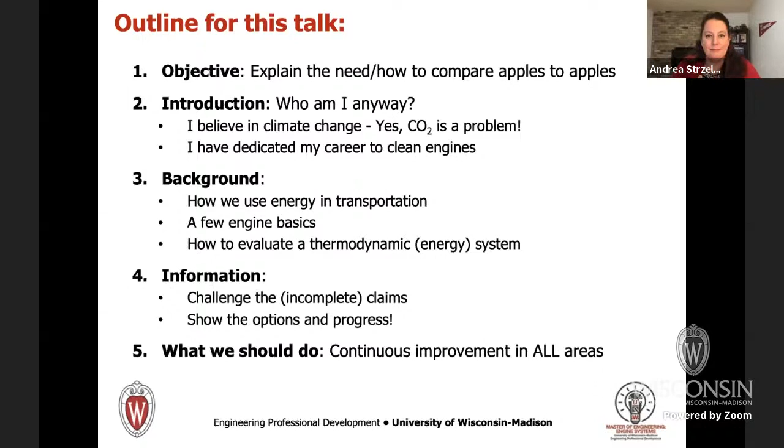Okay, so I have to start with a few acknowledgements. I used material from several people and I want to be very upfront about that. Dr. Kelly Senecal from Convergent Science here in Madison, who is really my inspiration for getting the word out and having the chance to have these opportunities to speak on this.

He is a Badger, and he gave a TEDx talk in Madison, which kind of inspired me to passionately promote this idea. He also started the Hug Your Engine hashtag. So lots of good stuff there.

Professor David Foster from the UW-ERC, my PhD advisor and a Badger. Professor Dennis Assanis from the University of Michigan Auto Lab and now president of the University of Delaware. Dr. Graham Conway from Southwest Research, and Dr. Todd Fansler, who worked at GM but now in his retirement years likes to do some research with us here at UW. So I thank them all for donating material.

I'm really honored to have this opportunity to add my voice to theirs and give my version of the explanation. So thank you, Tom, and Wednesday Night at the Lab for this opportunity.

So what is my objective in being here to talk to you tonight? Well, in this talk, I want to trash some false ideas. I want to tell you that electric vehicles are not zero emission vehicles, and I want to convince you that in fact there is absolutely no such thing.

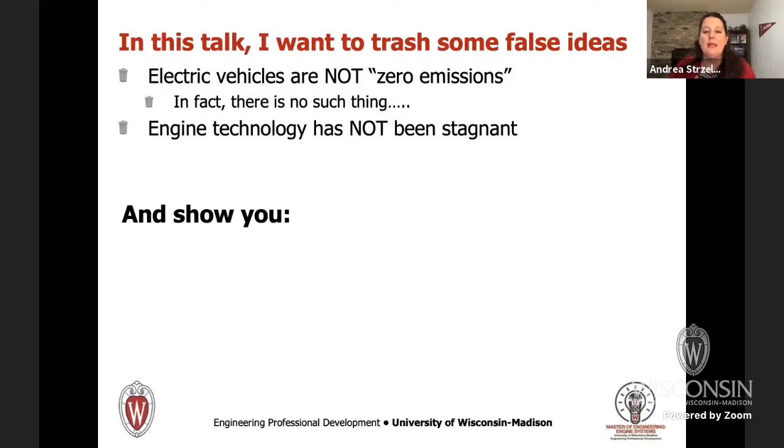There are things on our side of the table too that give you pathways to clean, green solutions. So what I'm hoping to really trash is the idea of a silver bullet, or the idea that a green future relies only on a single technology. It doesn't. My friend Kelly coined the phrase, the future is eclectic, and I think that needs to be true.

I think we need to not choose things a priori. We need to let the science and engineering dictate what's the cleanest, most efficient future. And the only way we're going to do that is if we continuously develop in all areas and let the winner emerge rather than choosing it in advance.

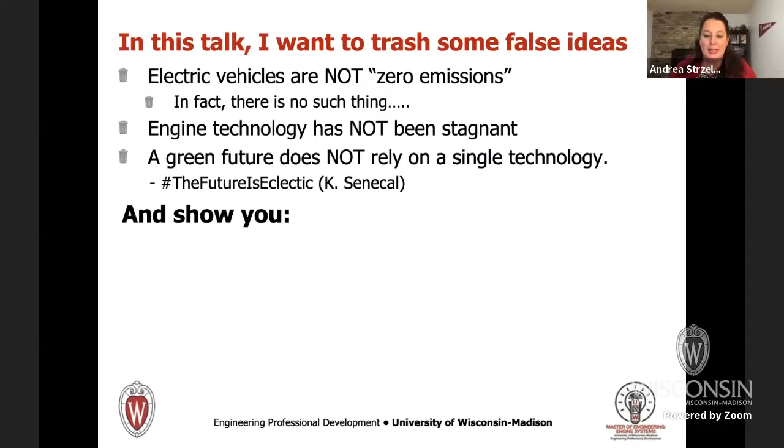I also want to show you what I like to say: dirty is in the details. In order to really evaluate things, you have to draw proper boundaries. An example of that is this lovely cartoon here, which shows two vehicles.

The top one is a diesel, and the guy inside who has tailpipe emissions feels really dirty because he has visible tailpipe emissions. The guy in the electric vehicle on the bottom has no tailpipe emissions. In fact, most electric vehicles don't even have a tailpipe, so he's feeling really clean. But the reality is he's using electricity from the power plant there, so he has distributed emissions, just not at the tailpipe.

I also want to show you how engines are continuously getting cleaner, including some of the work done right here at UW-Madison in novel combustion strategies and in catalysts. By the way, this is not only true of electric vehicles, but this cartoon has a version of fuel cells too.

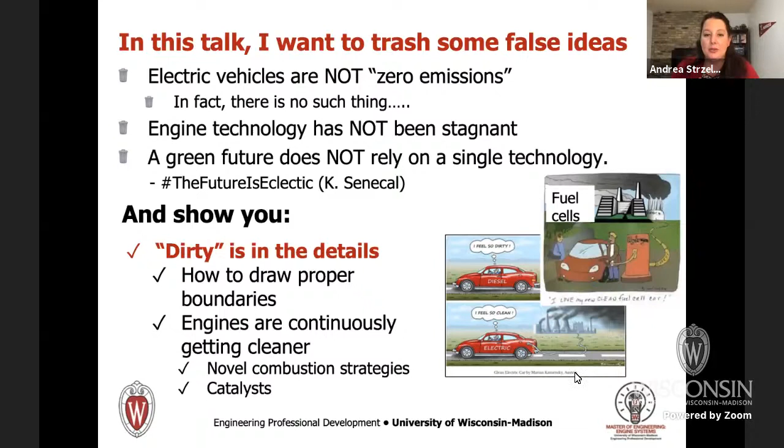Hydrogen does absolutely burn without generating any CO2. When hydrogen burns, you only have water as a product of combustion. However, hydrogen is not naturally occurring as a fuel, and it takes a lot of electricity to produce it. Therefore, fuel cell vehicles, while they don't have any CO2 at the tailpipe, do in fact have CO2 emissions associated with the formation of that hydrogen.

So why am I talking about this in particular? Well, I am a literal engine hugger, and I am the program director of the Master of Engineering in Engine Systems program here at Wisconsin. As Tom mentioned, I am a triple threat badger, studying right here at UW and in the Engine Research Center. I did my PhD work in collaboration with Oak Ridge National Laboratory, sponsored by USDOE, so I like to thank them for that PhD.

My work experience after I left Madison, I worked at two USDOE labs. There are 17 DOE labs, I've only collected two. Then I was a professor of mechanical engineering, first at Texas A&M and then at Mississippi State. So I want to say hi to Troy Huron, who I saw join — he was a former student. Then in 2019, I had the opportunity of a lifetime for any Badger: to come back here to Madison and work at my beloved University of Wisconsin. And so I've been back.

One thing my students can tell you about me is I am absolutely passionate about thermodynamics. Thermodynamics, as I mentioned before, is the study of energy, its transfers, and its transformations. But in order to do a proper thermodynamic analysis, you really need to set the boundary for that analysis, and I'm going to show you what that means.

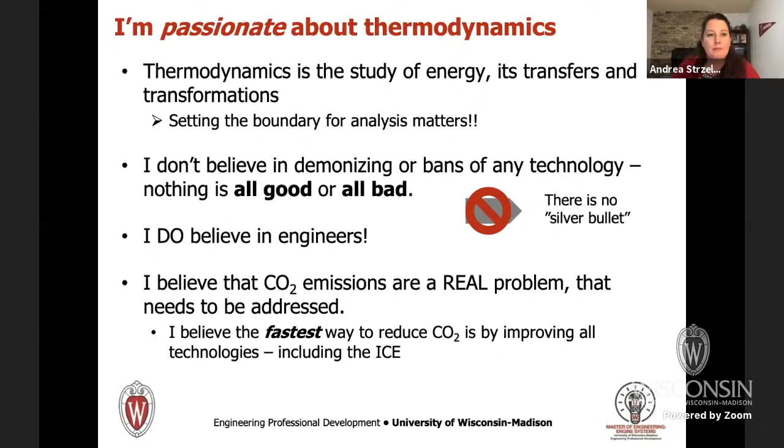So let's talk about some background. Here's energy use in the United States. What you see is that transportation accounts for 34% of all energy used in the United States. One thing I want to talk about is fuel economy — it's not only good for your wallet in that green way, it's also green in terms of emissions.

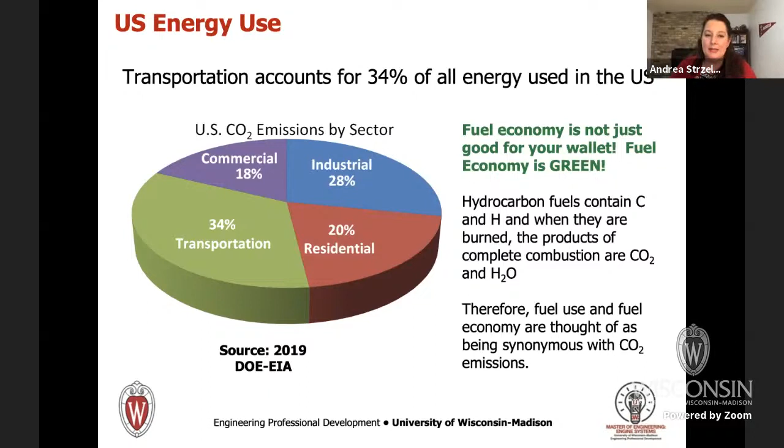Hydrocarbon fuels contain carbon and hydrogen, that's where the name comes from, and when they're burned, the products of combustion are CO2 and water. Therefore, anytime you're able to get more mileage out of a gallon, it means you're also getting more mileage for the same CO2. So we tend to think of fuel economy and CO2 emissions as kind of being synonymous because they are very much related.

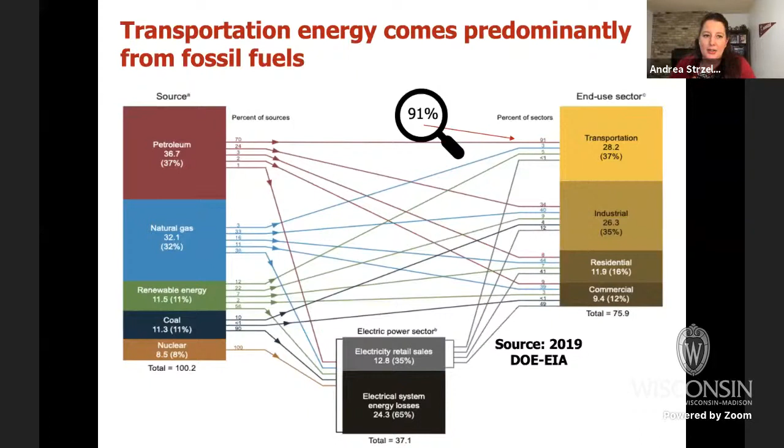Now, in the United States, transportation energy predominantly comes from fossil fuels. You can see my magnifying glass there shows that 91% of the energy in the transportation sector comes from petroleum. So that's why it's related to fuel economy, hydrocarbons, that whole nine yards.

If we take a minute to look at the history of engines, the first thing I want to point out is that the very first on-vehicle engine was actually a steam engine, not an internal combustion engine at all. Engine development has come quite a long way since the 1760s when we had steam engines on vehicles. The first internal combustion engine wasn't invented until 1807, and the first diesel engine, Rudolf Diesel's engine, in 1892, ran on coal dust.

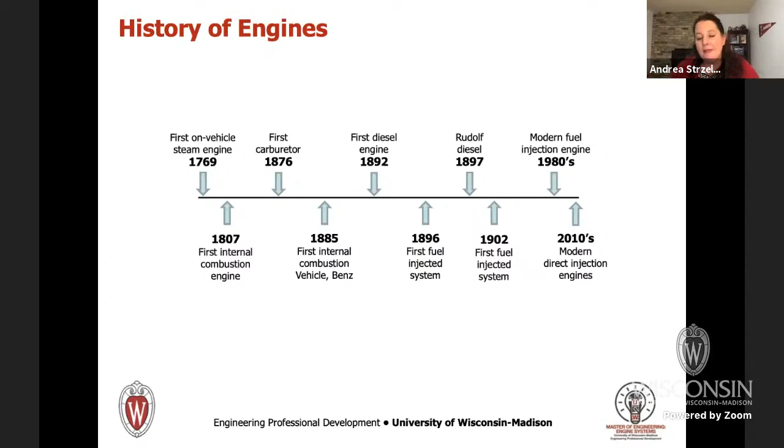The thing that's really important to notice here is, although I don't have a ton of arrows on that timeline, there has been continuous improvement in engines ever since they first appeared.

So what is the purpose of an internal combustion engine anyway? The purpose is to produce useful work, and the useful work we're talking about in this case is rotating shaft power. They do it by using readily available, stable combustible fuels, like liquid fuels such as gasoline or diesel, or gases like natural gas or propane. These fuels have a high power density, which is really important for both functionality and speed of the engine. Engines do this efficiently and at low cost, and in some cases the efficiency is greater than 50%.

For those of you that think, well, 50% isn't that great - actually, it really is. There are a lot of factors that come into play, and we're going to talk about how every time you transfer or translate energy, there's potential for losses through things like friction or electrical resistance. So 50% is actually pretty good, and it's certainly much higher than what we were seeing back in the early days of engines.

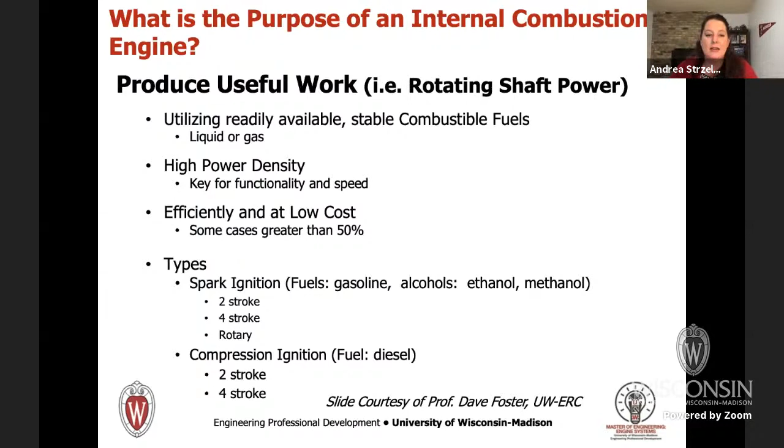There are two types of engines that are most common that we'll talk about: spark ignition engines, which are your gasoline engines, using fuels like gasoline and alcohol - this is why you see some ethanol in gasoline - and they come in 2-stroke, 4-stroke, and rotary varieties. Then there are compression ignition engines, which are your diesel engines, that also come in 2-stroke and 4-stroke varieties.

So how does a reciprocating engine produce power? The combustion of fuel releases heat in a closed volume. If you remember the ideal gas law from chemistry, that heat released into the volume increases the temperature and pressure. That increased pressure then pushes on the movable piston, which is connected via the connecting rod - you've got to love the engineering nomenclature - to the crankshaft, and it turns and rotates that shaft.

So the source energy is the fuel - it's actually the chemical bonds in the fuel. Oxygen from the air provides the oxidizer, and that combustion reaction releases heat. That gas pressure - pressure is a force exhibited over an area - the area is the top of the piston, so it forces it down. In order for this to happen smoothly, you need to coordinate combustion with the piston motion, and we do that by controlling the ignition of the fuel.

Now, we can't exceed the physical limits of the engine, so we have boundaries we need to work within for material reasons - the stress, the temperature, the pressure have to stay within a particular realm. This thermodynamic process - combustion is a thermodynamic process - is repeated very quickly over and over on a mechanical cycle.

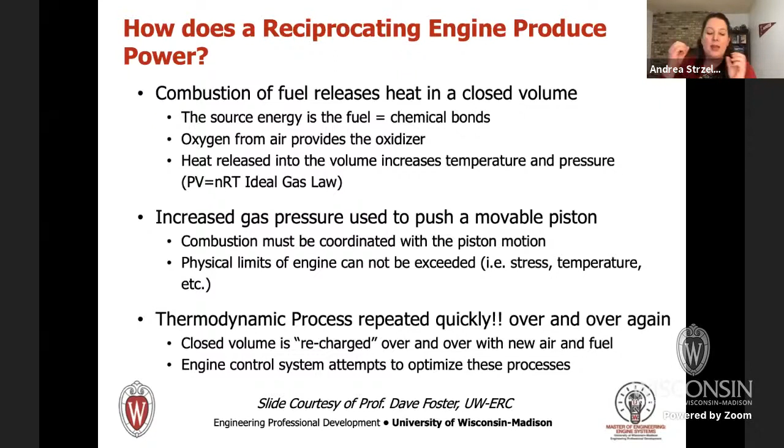That's why your spark timing is so important, so that it lights off the charge at the right time to create that power. So the 4 strokes of an internal combustion engine, if I give you their quick and dirty nomenclature of suck, squish, bang, blow, it'll probably help you remember it better than intake, compression, power, and exhaust. So I always like to say that.

What happens is the process starts with the intake valve opening. The intake charge comes into the cylinder as the piston is drawn down from top dead center to bottom dead center. As that piston pulls down that volume, it helps suck that intake charge in. And the intake charge is different if we're having a gasoline or a diesel engine, so I'll talk about that in a minute.

Then when the piston gets to bottom dead center and all that volume is filled with the intake charge, the intake valve closes, and the piston begins its movement up, compressing the gas. So you have both valves closed, so you have a closed volume, and the piston moves up and it squishes and compresses that gas. Then we have the power stroke.

The combustion event happens, and that heat release creates that force that acts on the piston and pushes it down, generating the power. And again, how that power stroke is initiated depends on the kind of engine, so we'll talk about that in a minute.

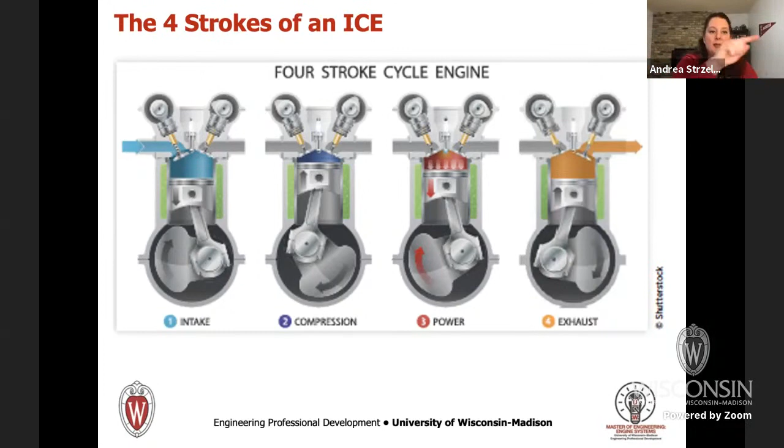Finally, when the piston is all the way down at bottom dead center after the power stroke, the exhaust valve will open and the piston will head up, pushing the spent gases out of the cylinder. Then the exhaust valve closes and we cycle back to the intake. So cycle, rinse, repeat.

For gasoline engines, which are spark ignited combustion, we have a homogeneous mixture, hopefully, that we are using as our intake charge. What we do is we pre-mix the fuel in the air before it goes into the cylinder, so that you have a nice, very well mixed air fuel mixture that's drawn in and compressed. We control the load on the engine by throttling that intake, by how much we are allowing to go in. The combustion event is initiated by a high energy electrical discharge across the spark plug gap.

So that's the spark. Can you see my pointer? The spark initiates the ignition event, and then the flame front burns throughout this mixture. This golden color here is the unburned region. This little kind of sun corona is the flame front, and you have the burnt products behind it. So the flame moves through, and behind the flame are the burned products.

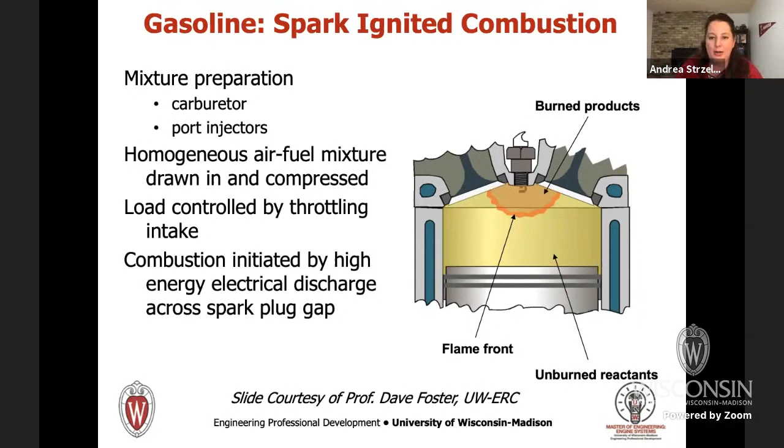In diesel, it's a different situation. Only air is drawn in as the intake charge in diesel and compressed. The load of the diesel engine is controlled by how much fuel we inject in. Now, because that fuel is injected into very high temperature, high pressure air, the fuel undergoes an auto ignition process and combusts as it is compression ignited for the combustion.

So in diesel, because you're introducing the fuel into that air mixture, you don't have that nice homogeneous mix. You actually end up with a highly heterogeneous mixture in the cylinder. There's a wide range of mixture concentrations of the fuel in the air where the chemical reactions occur. This is why emissions are a much more significant issue in diesel engines than they are in gasoline.

But you know what? That's okay, because people like me work on cleaning that up with after treatment systems. There are catalytic devices, the so-called class of catalytic converters. It's not just one device. For diesel, there are 3 catalytic converters that we use in the system, and it cleans up the exhaust, removing the carbon monoxide, the hydrocarbons, the NOx, and any of the soot. And like I said, you can clean it up with after treatment. I literally wrote the book on it, and you can see it there over my shoulder.

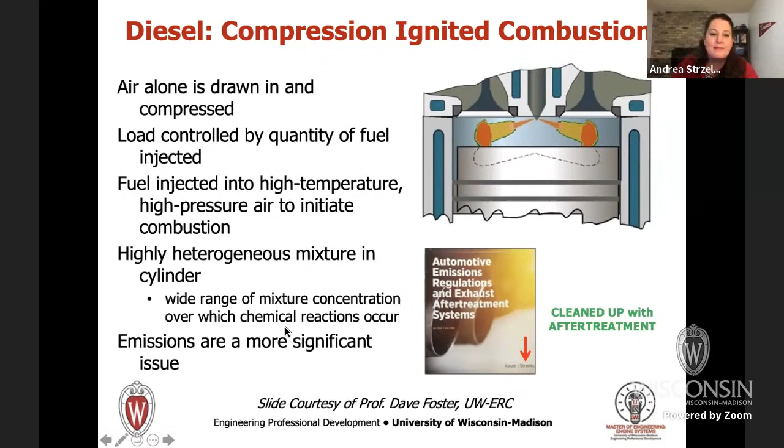There's an increase in CO2 emissions from developing nations. And on top of it, the rate of technology penetration on the vehicle fleet is not as fast as we would like. So even if you're coming out with cars every year that get better and better fuel economy and have less CO2 emissions, people aren't going out and replacing their cars every 6 months or a year. So it takes a while for the technology to penetrate into the fleet.

I also want to take a minute to talk about CAFE, the corporate average fuel economy standard. We have these CAFE standards set by class of vehicle. This is why the PT Cruiser is considered a light duty truck. If you're a manufacturer with a large range of vehicles and you want a lot of sales in your truck class, you want to enable people to buy the trucks they want to buy, so you need your average fuel economy for that class of truck to hit a target. By making the PT Cruiser fit the definition of a light duty truck, you can average in its relatively higher fuel economy compared to a quarter-ton pickup truck and meet your CAFE standard.

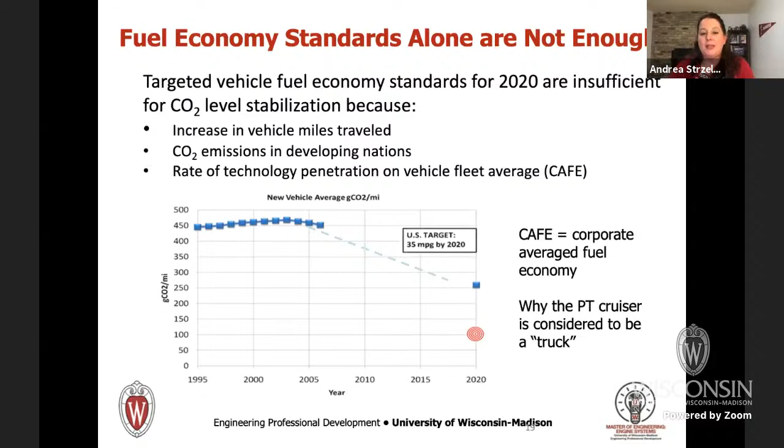We were talking before the presentation about metrics that you can game, and I think CAFE fits into that. When you look at these targets that politicians come up with, you have to be really careful how you set them, because anytime you set up a metric that can be gamed, it ends up not being a particularly valuable metric.

One thing I always like to talk about is when did engines become villains anyway? When did engines start getting all this negative press? Unfortunately, I can point to when, and that's the Dieselgate scandal. If you don't remember what that is, I'll tell you briefly. Dieselgate affected 11 million model year 2009 to 2015 Volkswagen vehicles that were intentionally programmed — please note, intentionally programmed — not to meet the emission standards. That means the vehicles absolutely could be clean; they just were intentionally programmed not to be. This scandal resulted in some really big fines and jail time for Volkswagen executives.

But the result of this was also the beginnings of the claims of the end of internal combustion engines, and what I'm going to call the beginning of the EV hype. I'm going to show you in a minute why I call it hype, because you have to look at the whole system and really make an educated determination on this.

You see here, The Economist called the engine roadkill. And what's really special about the picture on the right is that's the BMW headquarters, which was very specifically and famously designed to look like a 4-cylinder engine. They used lights to change it into looking like batteries, with the slogan 'The future is electric.' I think that's what inspired my friend Kelly to make a twist on that and say, no, the future should be eclectic. Hopefully by the end of this, you'll see why we think so.

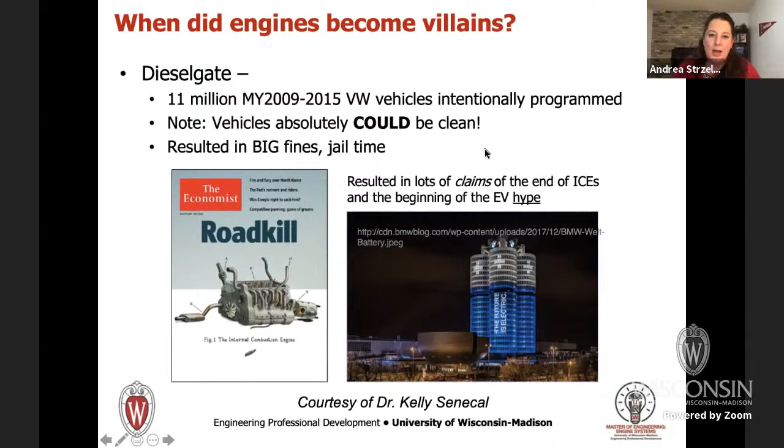Okay, so now for some science. It's Wednesday night at the lab, and labs do science. So I'm going to talk a little bit about thermodynamics — not too much, I promise.

When you do a thermodynamic analysis, in order to fairly compare two systems, it's really important that you define them properly. The system is whatever you want to study — it could be my coffee cup, my cell phone, or a car. Whatever we want to study, that's the system. Everything not in the system is in the surroundings, and we define the difference between the system and the surroundings by the boundary. Choosing your system and setting the boundary determines where we evaluate energy coming into or leaving the system, and the same with emissions, where they come in or leave. You're going to see in a moment how important this is when we talk about these different vehicle powertrains.

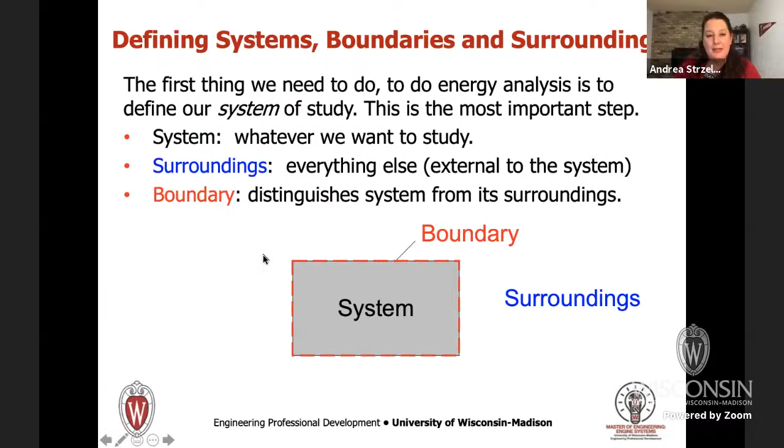So are we comparing apples to apples if we only consider tailpipe emissions? If we only consider CO2 for a moment, and only consider the vehicles, you see I have a Tesla there. Tesla doesn't have a tailpipe, so there's no tailpipe CO2.

And I have a Ford Edge, mostly because that's what I drive. And you see my Ford Edge does have CO2.

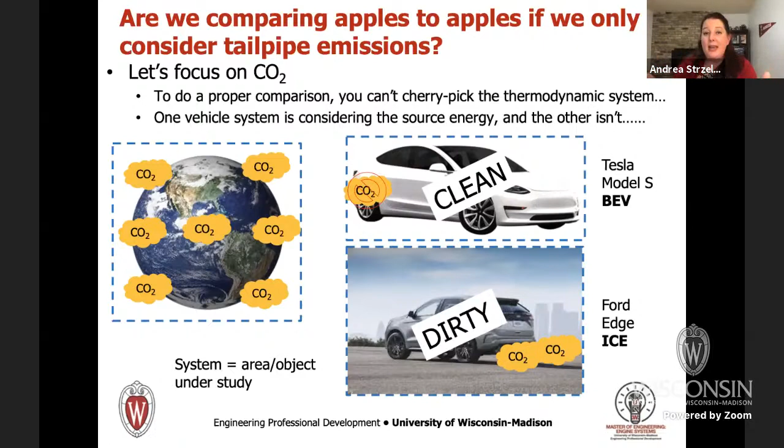The issue is it's not proper or fair to do the comparison where you're cherry picking these thermodynamic systems, because take a look at that system on the left. We all live in that same system on the left. And as we continue to fill it up with CO2, we can play all the games we want with the boundaries on the right, but it's not helping our problem with the boundary on the left. So why do I say this is cherry picking to just consider the vehicle? Well, one system is considering the source energy and the other is not. So when we classify these as clean and dirty, it's not a fair comparison because, again, one system is considering the source energy and the other is not.

So in order to make a fair comparison, we have to consider the energy source for both cars. So as my students will say, there, I fixed it for you. I put this nice Wisconsin coal power plant into the boundary with the Tesla so that now we're considering all the way from the energy source to its end use. And now what you see is that that's not so clean and this is not so dirty, right? If you consider the energy source from both cars, you have to admit that electricity is not a naturally occurring fuel. We have to make it.

And making it can generate CO2, and does if you're in the United States. In the United States, more than 70%, and actually even a little bit north of 75%, comes from coal and other fossil fuels. So you can see this Wired magazine article, and it changes depending upon where you are in the world. If you're in Norway, 98%, and it would be awesome if someone was joining us from Norway or Iceland, where they have 98 and 100% of their electricity coming from renewables.

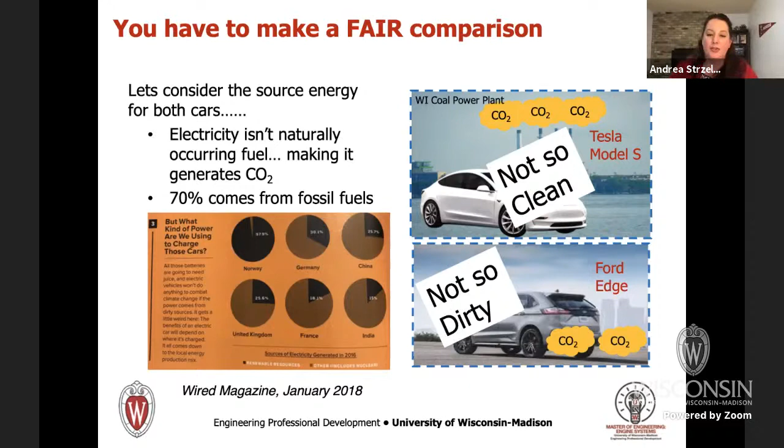But that's not the situation that we're in right now. And so you have to consider the energy source of the electricity as well. And that's why I've done that in these pictures here on the right, changing the Tesla from being a zero emission vehicle to a distributed emission vehicle. So if we're going to say zero emissions, we need to put a T in there. It needs to be zero tailpipe emissions. Then it becomes a true statement. The other way, it's a little bit misleading.

This energy source argument is not the only place where I feel like there's a little bit of hype when it comes to electric vehicles. And in order to explain that, I need to tell you a little bit more about how you can do analysis of these systems. So someone was asking me a question in the beginning before we started the talk, and this is the part that I was referring to.

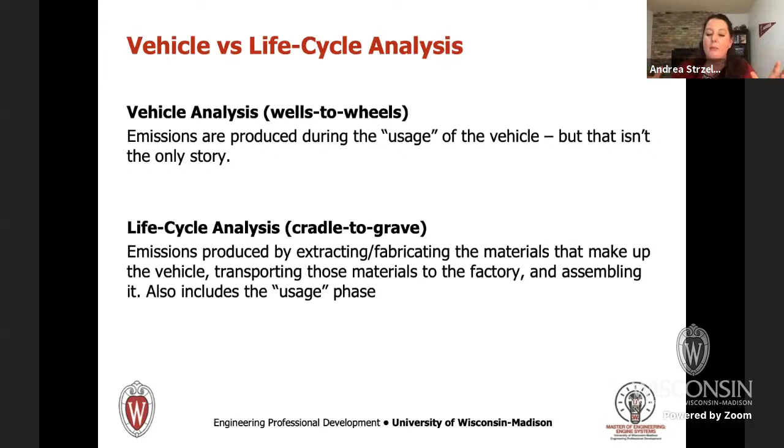If we do only a vehicle analysis, the so-called wells to wheels analysis, we're only considering the emissions that are produced during the usage stage of the vehicle. But that's not the full story. So the previous slide with the Tesla and the coal plant and the Ford Edge with its CO2 at the tailpipe, that's wells to wheels. That's looking at just the usage of the vehicle. However, there's also what's called life cycle analysis, or cradle to grave. That includes emissions produced by extracting or fabricating the materials that make up the vehicle, including the battery and the motor or the engine, transporting those materials to the factory, assembly, and all that kind of stuff. And it includes the usage phase. So life cycle analysis is inclusive of vehicle analysis and has more of the whole picture.

So wells to wheels emissions is just this first part of my chart here. It covers primary fuel production, fuel refining, fuel distribution, to the fuel station, where you put it into the car and where you use it.

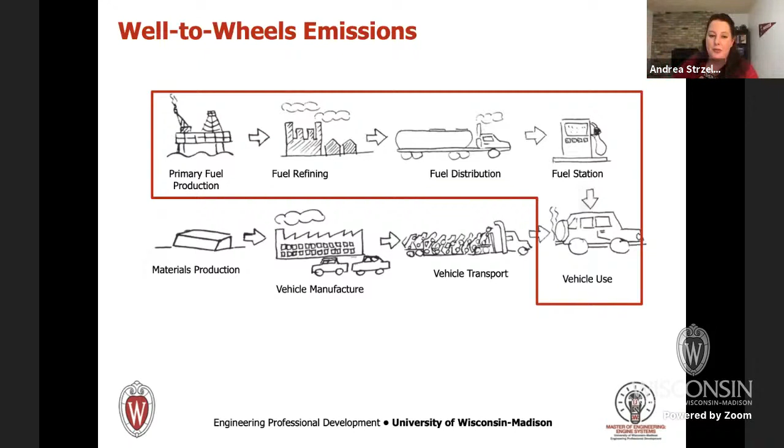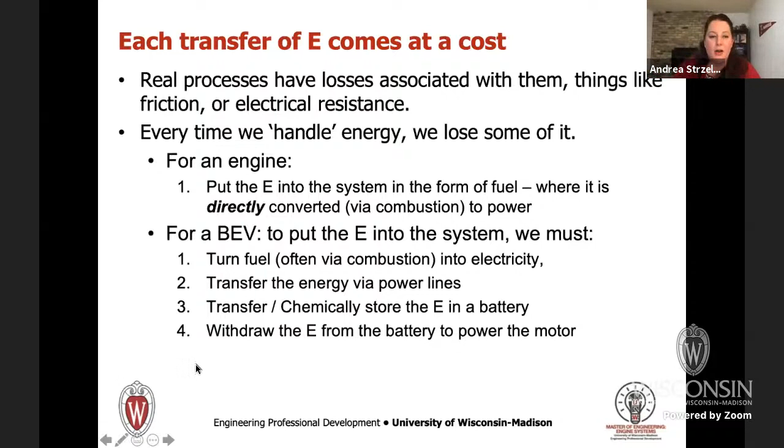First, we have to turn the fuel, often via combustion if you're coal or natural gas, into electricity. Then we're going to transfer the energy via the power lines, where it might meet with some electrical resistance. Then we're going to transfer and chemically store the energy in a battery, so that's another transformation with some loss. And then we're going to withdraw the energy from the battery to power the motor, so we're going to unchemically store it, and there's also a potential for loss. All these things add up, and I want to show you that.

The other thing I want to talk about is how we get energy into the system, which we talked about a little at the beginning too. When I go to the fuel station, it takes me roughly 2 or 3 minutes to put 15 gallons of gasoline in my car. Gasoline has about 131,000 kilojoules per gallon, which means I'm transferring nearly 2 megajoules of energy, transferring at the rate of 16.5 kilowatts.

That's super impressive. And if you're not the only car at the gas station—I should put in the picture of the Texas gas station with the 200 pumps—that's a lot of energy that you're transferring very, very quickly there.

In comparison, one of the things when you talk about batteries is that charging takes a lot longer to do that chemical storage of energy. If we look at the Tesla 100 kilowatt-hour battery, that's about 360 megajoules, and slow charging takes 10 to 14 hours. Rapid charging is 3 to 6 hours, and even fast charging takes more than an hour.

Now, you can charge to about 80% in 30 minutes in fast charging mode, but this is an unfortunate truth of thermodynamics: the faster you do something, the more it degrades and the more energy you lose. So faster charging ages the battery, and therefore Tesla limits the number of fast charges you can do. So you're not going to drive over the river and through the woods to visit grandma and achieve that by fast charging at stations along the way.

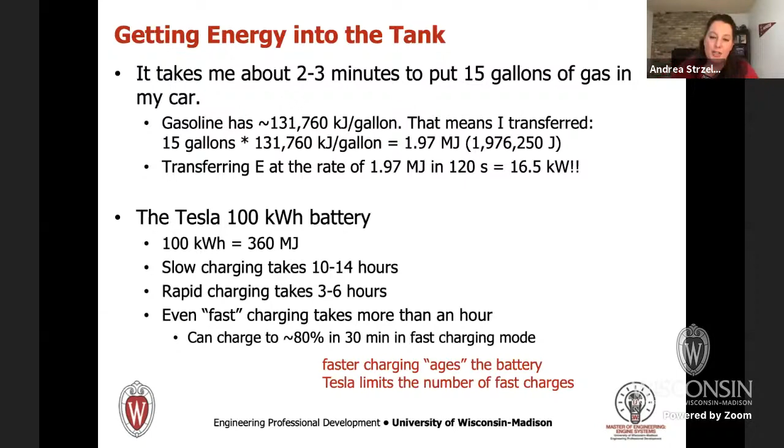Okay, so back to comparing efficiencies on the well to wheel basis. If you look at just the tank to wheels—which is what I think people focus on a lot—meaning from the time we put electricity into the battery electric vehicle, the vehicle is 80% efficient at converting that energy stored in the battery into motive force, your miles per gallon. That's fantastic.

Whereas your gasoline vehicle—and this graphic is a little dated, but it's such a good one that I like to use it—is more like 32, maybe 35% for gasoline direct injected engines. So that comparison at just tank to wheels looks very, very good for the electric vehicle. And I think this is one of the hype things I want to warn you about.

But when you look at the whole conversion, going well to tank and adding that to tank to wheels, you see that the power generation from coal to electricity and transmitting it is only about 30% efficient. Whereas taking the oil from the wellhead through the refinery and transporting it is about 83% efficient. And the truth about efficiencies is they are multiplicative. So 30% times 80%, and 83% times 29%, ends up with both processes being about 24% efficient. So even on a wells to wheels basis, when you compare the whole story, the efficiencies are actually much more matched than you've probably been led to believe.

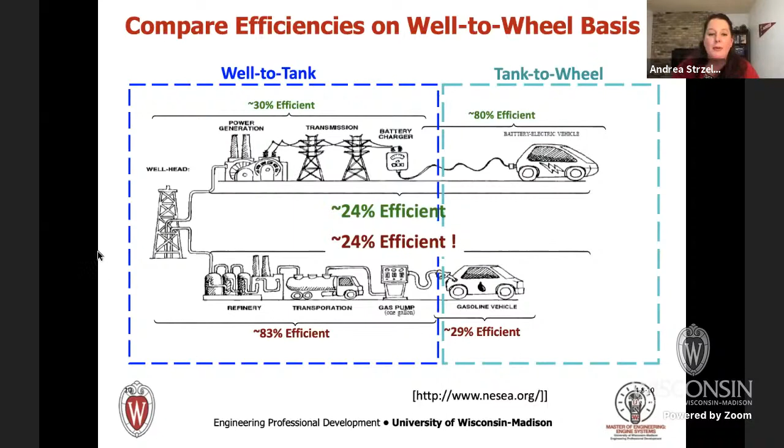Now, here's a fun fact about Wisconsin winter, and you in Hawaii, I don't want to hear about it—right now it's really cold here. This is DOE Fact of the Week, number 1164, by the way. You can sign up for these DOE Fact of the Week emails, and they send you a really cool fact every week. This was 1164 from a couple weeks ago.

The point of this slide is showing you that fuel economy drops in cold weather no matter what kind of vehicle you have, but electric vehicles get a higher penalty on that than gasoline vehicles. So the comparison here is a nice Madison summer day at 77 degrees Fahrenheit, with a gasoline vehicle city driving set as our 100%. When the weather drops to 20 Fahrenheit, we lose 15% of our fuel economy in that same gasoline vehicle doing the same city driving.

If you have a hybrid vehicle, something like the Volt we were talking about before, or a Prius, you'll start to see more of a 30 to 34% drop. And if you go to a full battery electric, so now the Chevy Bolt or a Tesla, the penalty is more like 39%. Of course, it will vary by vehicle, driving conditions, and many other factors, but on average, this is the impact of weather.

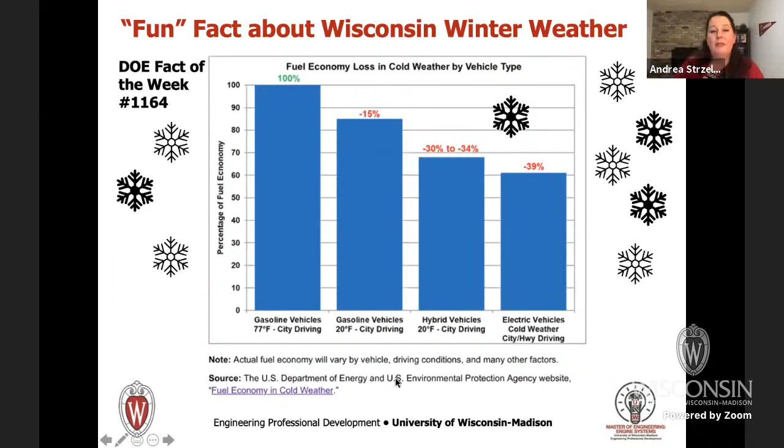But that's still not the whole picture, because we also have to talk about manufacturing. And that brings up what we call cradle to grave analysis. So now we're considering the whole picture, from mining the materials and producing the materials, to manufacturing the vehicle, to transporting the vehicle to the car lot where you buy it, to actually then using the vehicle. Cradle to grave also considers that in-use portion as well.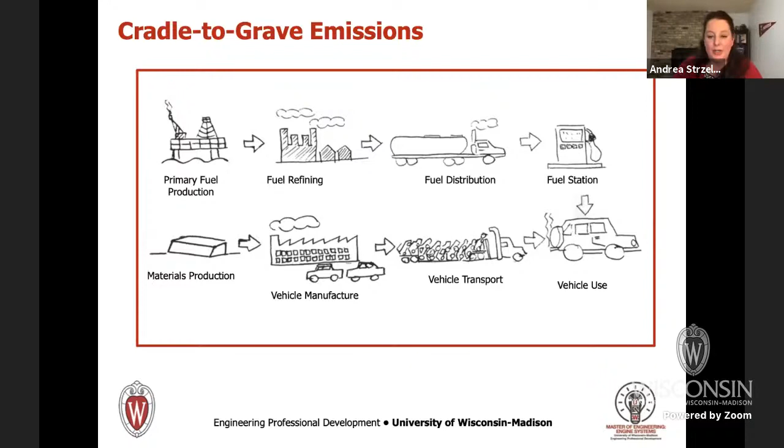Manufacturing is a big source of CO2. And unfortunately, battery production means that you're already starting with a lot more CO2 in your column at the start before you've even driven the vehicle 1 mile. So let's use this beautiful blue BMW 320d as our comparison vehicle. It has a diesel engine, and it produces about 109 grams per kilometer of CO2 when you're driving it.

Manufacturing that engine, making that engine, which is a cast iron block, generates enough CO2 that it's like driving this vehicle 950 miles. So before we've driven this vehicle mile 1, just in manufacturing the engine we've already made the equivalent CO2 as driving 950 miles.

In comparison, the Nissan Leaf is a smaller range battery electric vehicle, so it only has a battery and electric generator motor. It has no engine, but it has a smaller battery because it has a smaller range, so it has a 40 kilowatt hour battery. The amount of CO2 that's generated from the battery production is 4,800 kilograms. That's equivalent to driving that 320d 26,600 miles before you've ever driven that Leaf mile 1. So manufacturing the battery is much more CO2 intensive than manufacturing the engine.

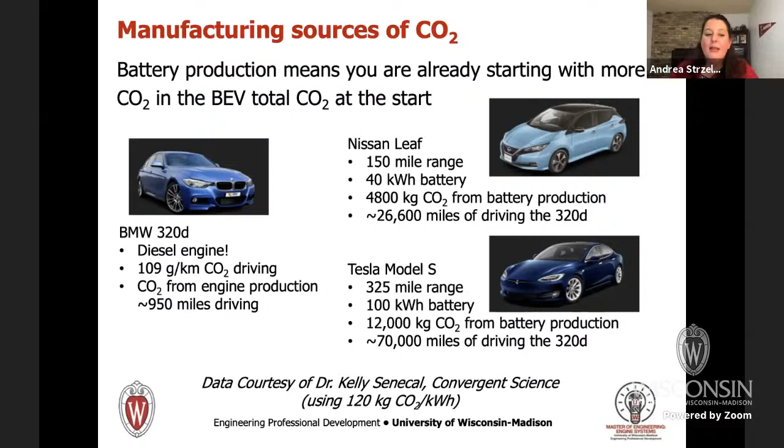That's about the middle of the range. People report wide ranges on that. This is using somewhere in the middle, the average. It, of course, depends on where the electricity at the plants is coming from. This is the average for a US mix of power.

So what we just saw is that the bigger the battery, the more CO2 it takes to create that battery. That's why there are different starting points before we've even driven a mile. The smallest was the 320D's engine. Then the smaller range electric vehicle was next. And finally, the full larger range electric vehicle had the most.

What you see is, although the slope of the line for the conventional internal combustion engine vehicle is the steepest, meaning it generates the most CO2 relatively while in use, it still takes about 90,000 miles of driving for the conventional engine to catch up to the amount of CO2 generated from this smaller range electric vehicle, simply because of this starting point. The larger range electric vehicle, because it started at such a much higher level, notice that even out here at 180,000 miles driven, we still haven't caught up in terms of total CO2 produced.

So that's really important to think about, right? Although you might not be generating CO2 at the tailpipe, and although you might be generating less CO2 by using that electric vehicle, because of your production of the battery, you're still overall generating more CO2.

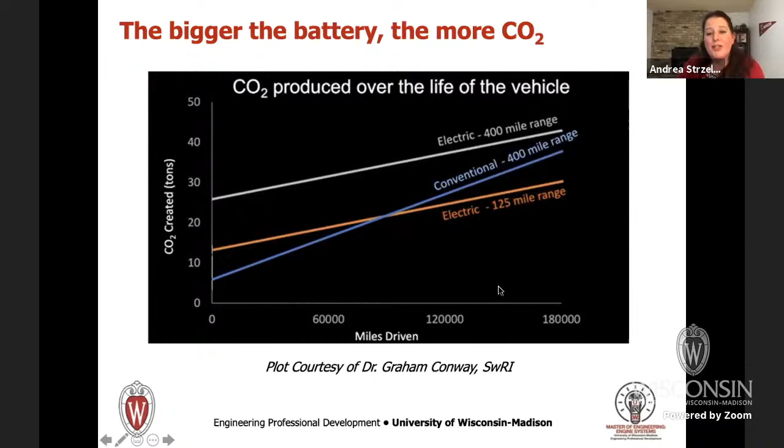Now I warned you, don't think this, but maybe you're still thinking, but engines are old technology and batteries are the future. Well, actually, in terms of the percentage of total vehicle sales, electric vehicle sales peaked in 1912. Here's the Waverley Electric, at a whopping 2250. We saw actually the first electric vehicles in the 1850s. In the 1890s, there were even taxis that were EVs in New York City.

But by the 1920s, early electric vehicles were nearly extinct for many of the same issues we face today: battery storage capacity, the so-called range anxiety of how far you can go on a single charge, limited charging infrastructure—we see gas stations all over town but not nearly as many opportunities to charge an electric vehicle—and competition with the internal combustion engine.

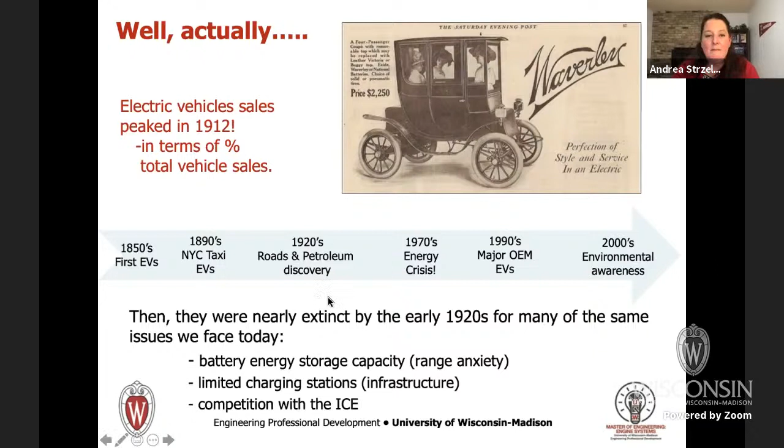So we're sort of looping back on ourselves in this timeline, and many of the problems from the early electric vehicles are still true today. Even though things are getting better, you have to remember these problems have been around for a long time.

If you're saying batteries are always getting better and we're moving towards renewables for electricity, well, engines have been improving too, through techniques like variable valve actuation, aggressive exhaust gas recirculation, high pressure direct fuel injection systems enabling gasoline direct injection, and—my personal favorite—particulate filters and lean NOx after-treatment. We've been cleaning up and making engines more efficient all along that same development timeline.

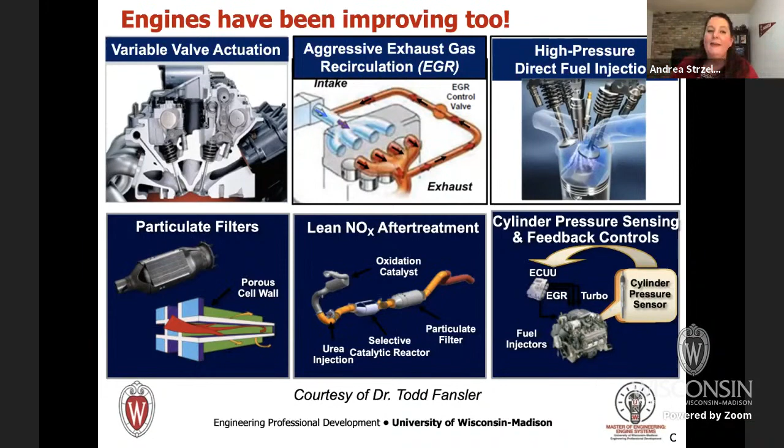So one caution: if your argument is that we're moving towards renewables and batteries are getting better, engines are getting better too, and we're also moving towards renewables in terms of fuels—I'll show you that in a minute. There are a lot of really great results coming out of continued research into engines.

The US DOE has several programs, like the Super Truck program—we're now in Super Truck 2. They've nearly doubled the miles per gallon fuel economy of Class 8 trucks, the semi trucks delivering all our Amazon packages. So research works; we can get better in all these areas if we keep working at it.

There's also the US DOE Co-Optima program, where they look at the evolution of fuels and engines together to build a cleaner future. Notice the miles per gallon graphic here: after a period of adding a lot of weight for safety and a lot of parasitic electronics—some nice, like heated seats—we turned a corner and have been steadily increasing fuel economy in conventional engine vehicles.

Just like electricity is getting renewable, fuels are getting sustainable and renewable too. Biofuels enable a carbon recycling loop: instead of releasing chained hydrocarbons stored in oil, we're growing plants that remove CO2 from the air and only re-release that same CO2. Biofuels are derived from biomass—plant matter, trees, grasses, agricultural residues, and other biological materials.

There's a range of options: ethanol, which we already have in vehicles, biodiesel, bioethanol, bioreformate—things like what Virent right here in Madison is working on. There are lots of ways we're making fuels for internal combustion engines greener and more renewable as well.

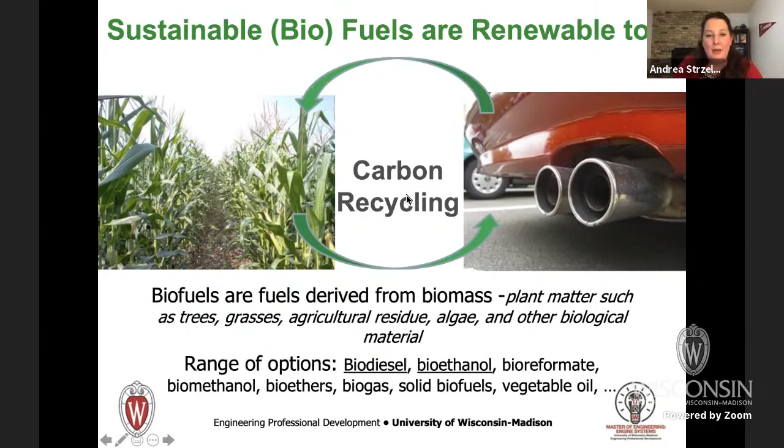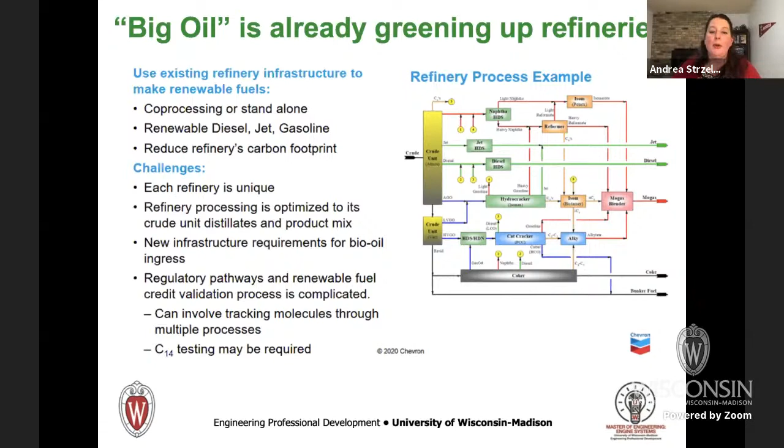The advantage here is we already have a very healthy, well-developed infrastructure for distributing liquid hydrocarbon fuels throughout the US. If we could get to green fuels—like getting to green electricity—we already have this great distribution system through existing pipelines, and vehicles that can burn them, and we can get clean that way too.

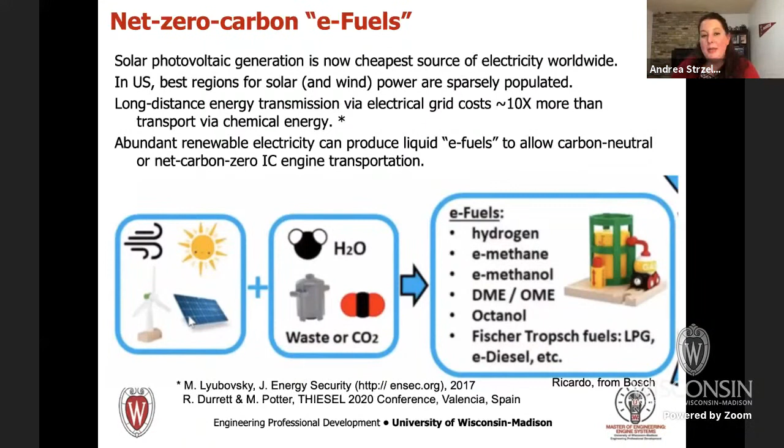There are also net zero carbon e-fuels, where you use abundant renewable electricity—that's where the E comes from, they're electrically driven fuels—and take waste or CO2 from the air, using electricity in a process of catalytic upgrading to create hydrocarbon fuels from captured CO2. This is another CO2 recycle loop we could consider for hydrocarbon fuels.

So the question is, what should we do to go green?

The fastest way is to hybridize. There are many levels of electrification when it comes to vehicles. An electrified car is not necessarily electric, but an electric car is electrified. So let's put it this way: a battery electric vehicle is 100% electric. If a car has an exhaust, it's not electric.

Electrified means that we're using electric power beyond the basic accessories, and includes all the way up to vehicles using various levels of power beyond that. So you have everything from micro hybrids, which is your start-stop technologies, to full hybrids that are now allowing electric driving, to extended range hybrids where the internal combustion engine is only used to charge the battery. But all of those electrified cases include an internal combustion engine.

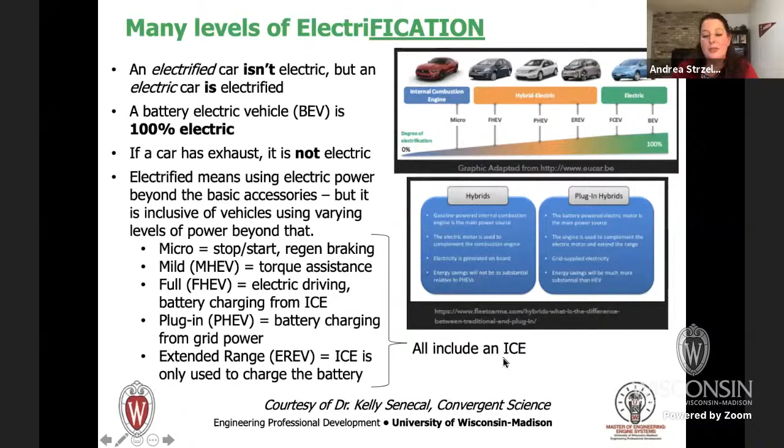So when I said at the beginning that I think engines are going to be around for quite a while yet, notice all these electrified cases still use an internal combustion engine. Again, battery electric vehicle is the only one that's fully electric. I'm going to speed through these slides quickly in the interest of time. There are lots of different kinds of hybrids, plug-in hybrids.

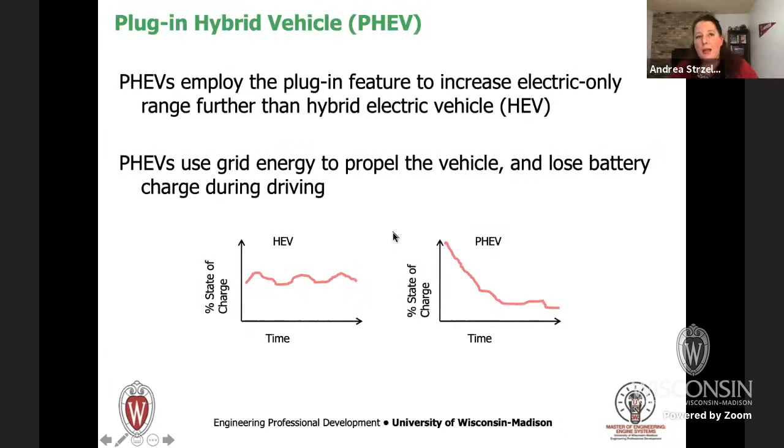There's a lot of advantages to hybridization. You increase fuel efficiency because you're able to downsize the internal combustion engine, since the battery makes up for the power. You can run the internal combustion engine at optimum settings. You can use regenerative braking to recycle previously lost energy that can now be restored. And it allows you to shut off the engine at idle, so you're not creating emissions if you're not running anything.

There are several levels of electrification and even several arrangements, series and parallel. Both have their advantages and disadvantages. In general, a series hybrid is more efficient but less powerful than a parallel hybrid. A series hybrid is something like the Chevy Volt that someone mentioned earlier.

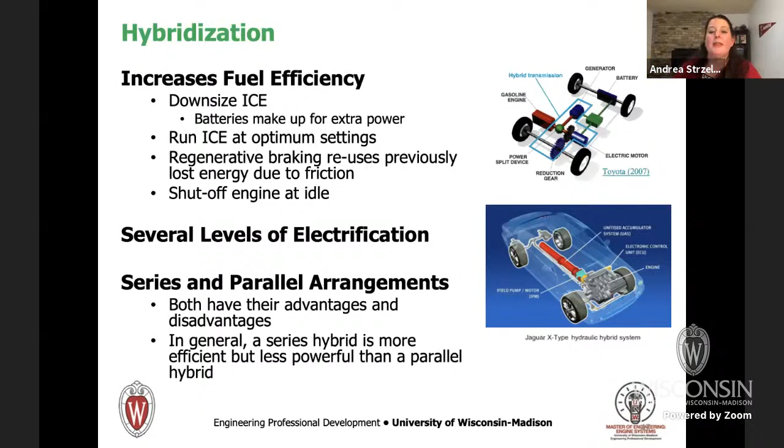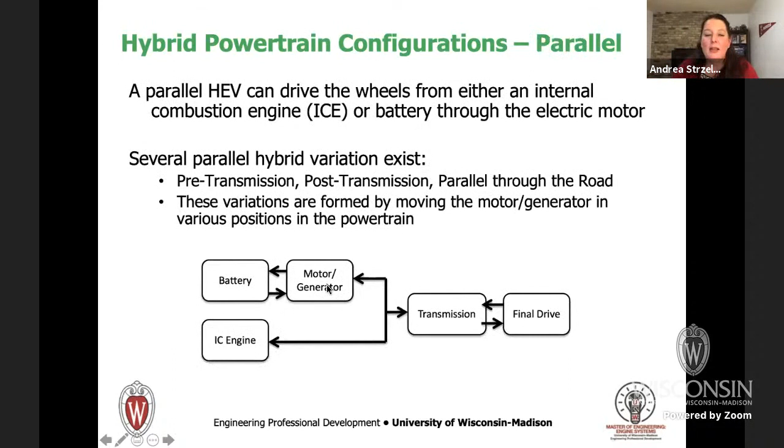When you look at hybrids and make a comparison to both of the parents that we had before—that conventional internal combustion engine vehicle, and this longer range electric vehicle—note that the hybrid is better than either parent over the entire life cycle of the vehicle. Hybrids do produce a little bit more emissions in the manufacturing phase, but less than full battery electrics because it's a much smaller battery. Making and using a hybrid in the United States produces less CO2 than either a conventional engine or a battery electric car, and you can see that over the life cycle of the engine.

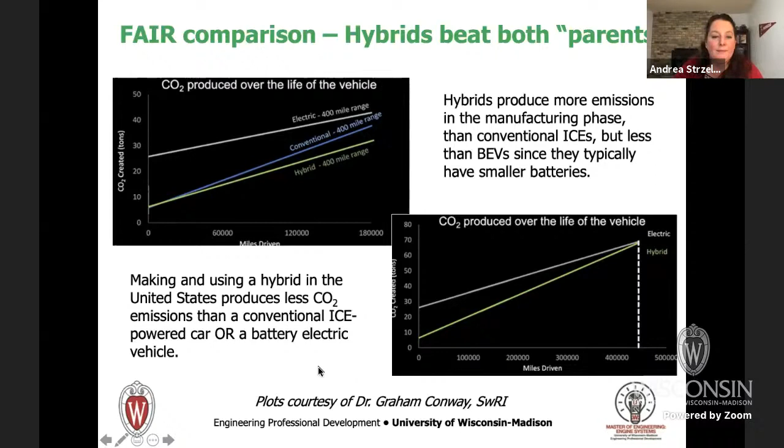So hybrids are electrified, meaning they have both the electric powertrain and the internal combustion engine. All of these things need to be continuously improving, both the electric side and the internal combustion engine, to further improve here. But what I want to show you is there is a future for engines—they're not going away. So do I think the traditional OEMs, the original equipment manufacturers, are going to be around? Yeah, I do, because I think there is a future for engines for a while.

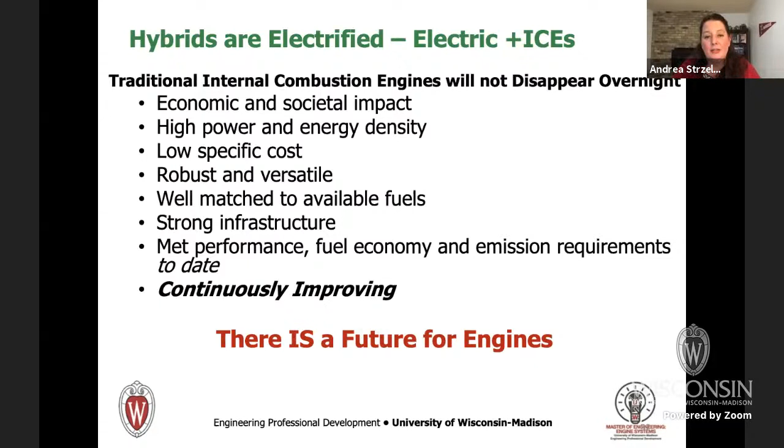Be careful how you read the headlines. I stole this slide from Todd Fansler too: reports of my death have been greatly exaggerated, says the engine, in a slight misquoting of Mark Twain.

So wrapping up, because I see I'm down here on time: the future of transportation needs to include diversity. We should not be choosing the winner in advance. Look at the advantages that we saw of the hybrid system that includes both of these things. I think the real key is to be continuously improving in all these areas and let the technology emerge that's going to solve the problem that we want to solve. Let's set targets on CO2 emissions or fuel economy, and let's do honest analysis of the full life cycle of the vehicle in order to make this comparison.

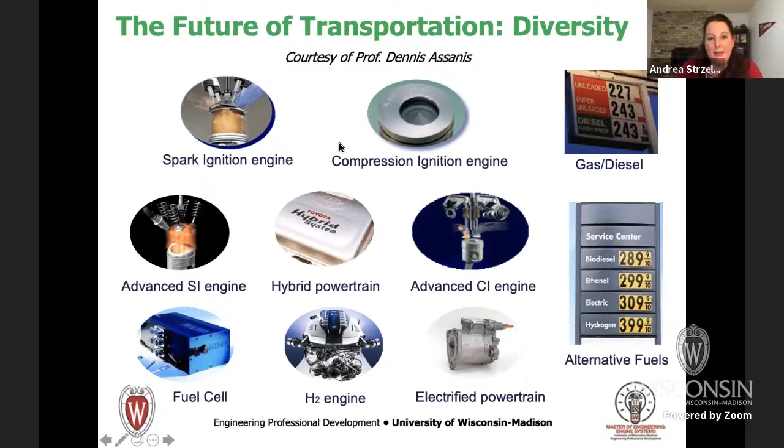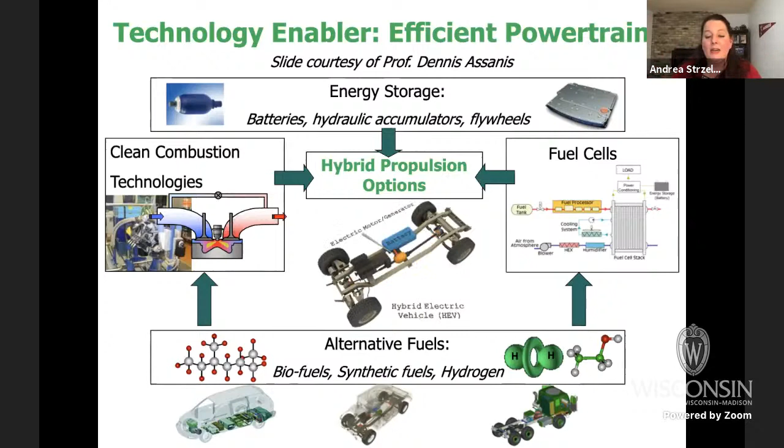There are a lot of technologies that enable efficient powertrains—things like energy storage, meaning the batteries, clean combustion strategies, fuel cells, alternative fuels, and aftertreatment. All these things enable hybrid propulsion options that are going to be cleaner and more efficient than what we've typically seen today. So I'll skip through this quickly, but if you have a conventional vehicle that's using petroleum, you're going to generate the most CO2.

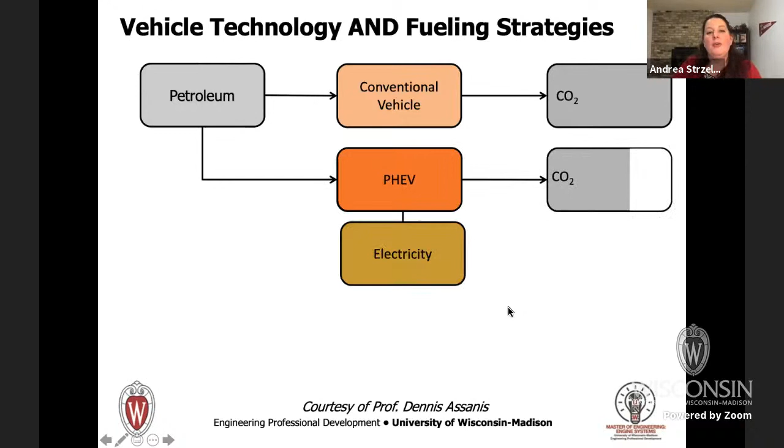As we hybridize, we generate less CO2. As we green up the electrical grid, we see even less CO2. And as we move to biofuels, we reduce the CO2 even further, meaning all of these things contribute to a cleaner future.

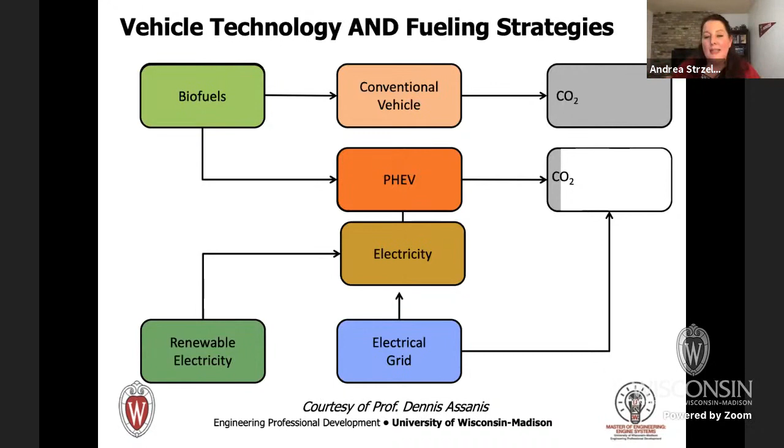So what I hope you see here is there is no silver bullet solution. Even though right now it looks like hybrids are the cleanest, greenest option, dramatic reduction in fuel consumption and net vehicle emissions can even further improve through efficient energy conversion and next generation biofuels and vehicle electrification and lightweighting of structures.

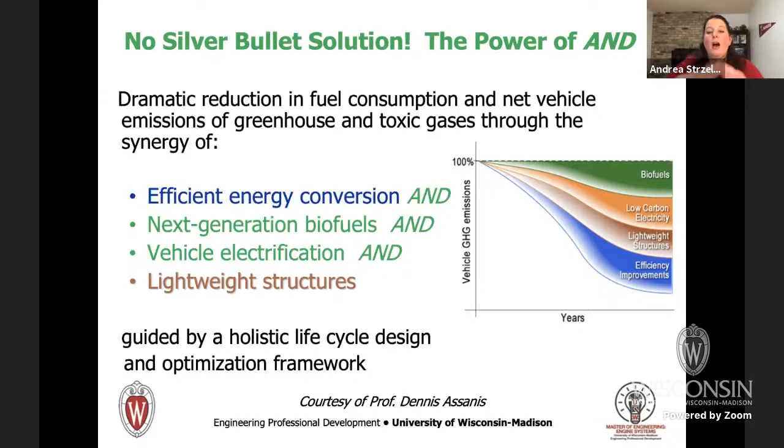So hopefully, what did we learn in this talk? That there's no such thing as a zero emissions vehicle. It's not zero. We have to draw our system boundary to consider the energy source, because that's where the emissions get generated, in that conversion of the energy source. We also saw that manufacturing generates emissions, more so for batteries than for engines. So if we want to talk about things like zero emissions vehicle, or my favorite nonsense, partial zero emissions vehicles, we need to put a T in there and admit that we're only talking about the tailpipe.

Also, both batteries and engines are old technology. Both of them have been around a long time. Battery and electric vehicles are not new, and both of them are continuously improving and should continuously improve in order to get us to the cleanest, greenest future.

And also, we shouldn't pick the winner in advance. We should choose the targets, whether that's efficiency or emissions, and let the engineers go to it. There are so many clever and creative people out there. Thermodynamics is not political. Thermodynamics tells you honestly what the analysis is. So let's not choose a solution based on politics. Let's choose based on science.